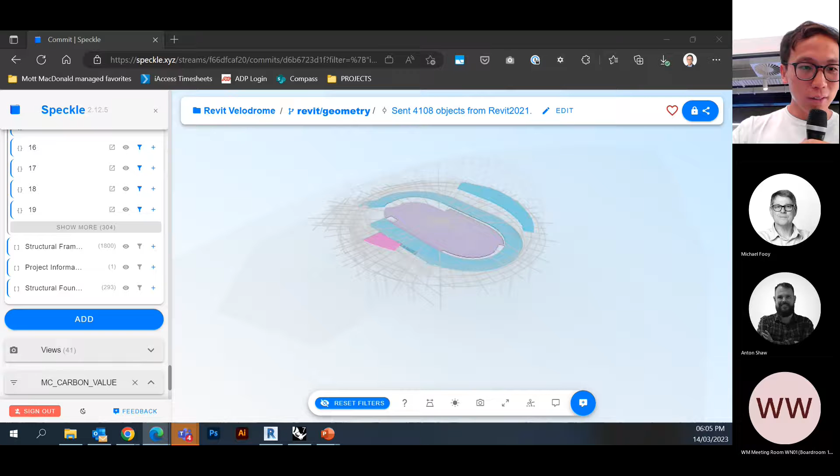Wellington, if you guys can hear us, give us a bell. The speaker should be on. Yep, I think we're good. Cool, awesome. All right, I will.

Preparing your data for visual analysis using Speckle. I'll begin my presentation with building information modeling. For those of you not in the construction industry, building information modeling is the creation of 3D objects within architecture, engineering, and construction industry that have extra data attached to them, otherwise known as metadata. Data is the most valuable currency of our time, and this is even more apparent in our workflows as they reveal to us exactly what it is that we're doing. Traditional building construction softwares such as Revit have these features built right in.

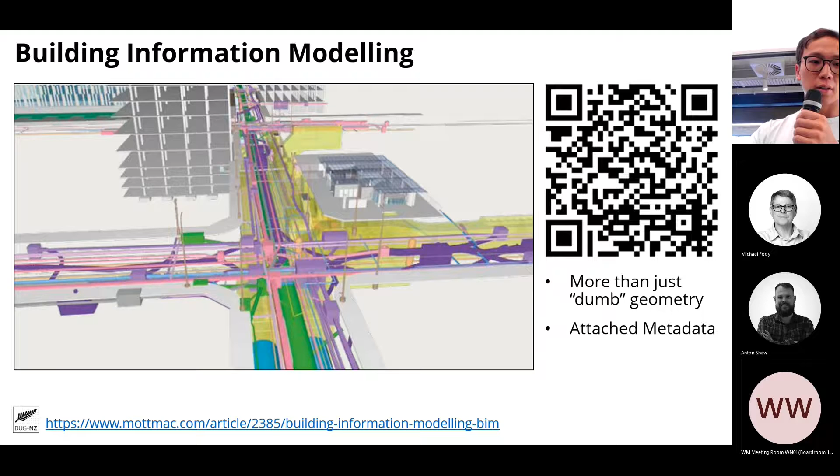But in other 3D modeling softwares, this is not the case. As part of our regular workflows, we use Rhino, an extendable 3D modeling software, together with Grasshopper, which is a visual scripting plugin for Rhino.

We use these tools in order to conduct various kinds of simulations and calculations. More often than not, all of the results of these calculations are often exported to Excel spreadsheets and lost in someone's downloads folder or desktop, and can easily break the link in our other BIM integrated workflows if not captured properly.

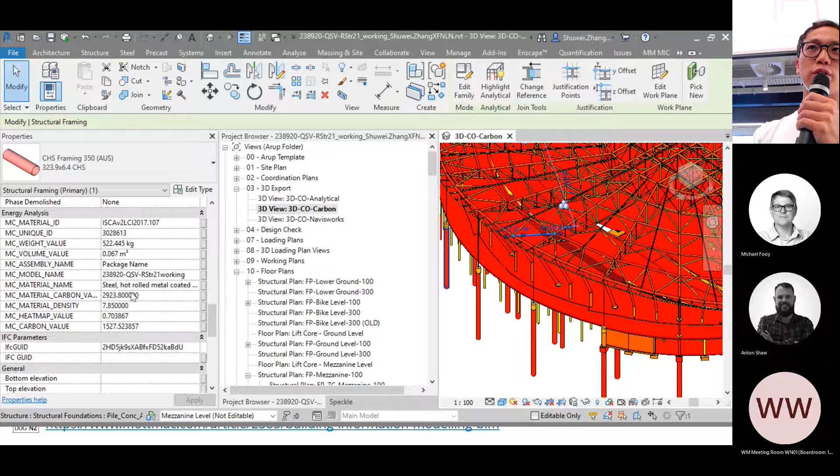So with this, I'll just quickly show you guys what the BIM environment looks like. As you can see here in our 3D model, we have an element that is selected and attached to it with various amounts of information on the side there.

Continuing on, this is where Speckle comes in. Speckle is an open source plugin built on top of many programs we already use in the day-to-day, with connectors to Revit, AutoCAD, and Rhino, and many others, such as Blender, Civil 3D, and other softwares.

What makes Speckle different from all the other interoperability plugins is the ability to freely customize your own data, choose what to keep, how you want to format them, and how you want to control them. This adds BIM capabilities to tools which otherwise wouldn't have had them, such as AutoCAD, Rhino, and by extension, all the other connectors they have there.

So in today's workshop, we will go over exactly how to do this in our Rhino Grasshopper environment and all the data that we can capture.

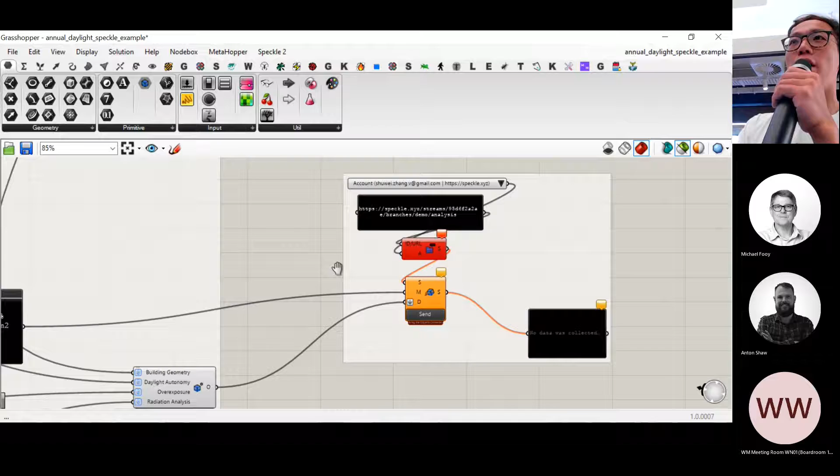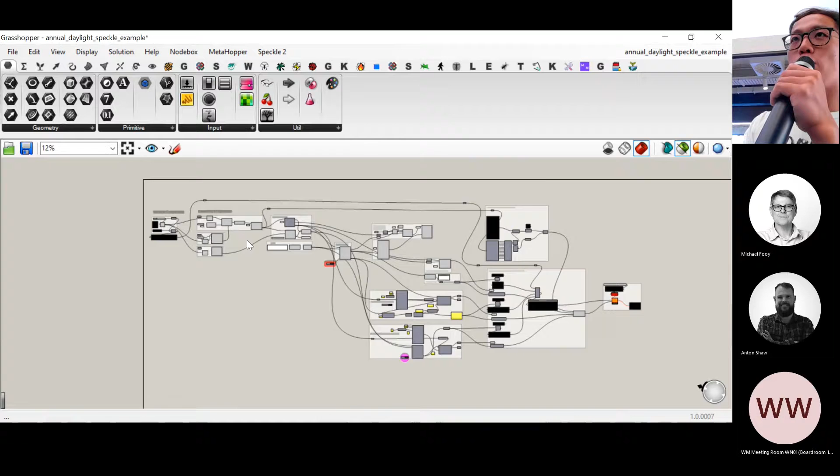Heading across to our live demo, this is a file that I've shared with everybody in our DUG user group GitHub repository. It's taking the simple example file from Ladybug Tools, which is one that we use for climate analysis and performance, and then attaching the Speckle component to it.

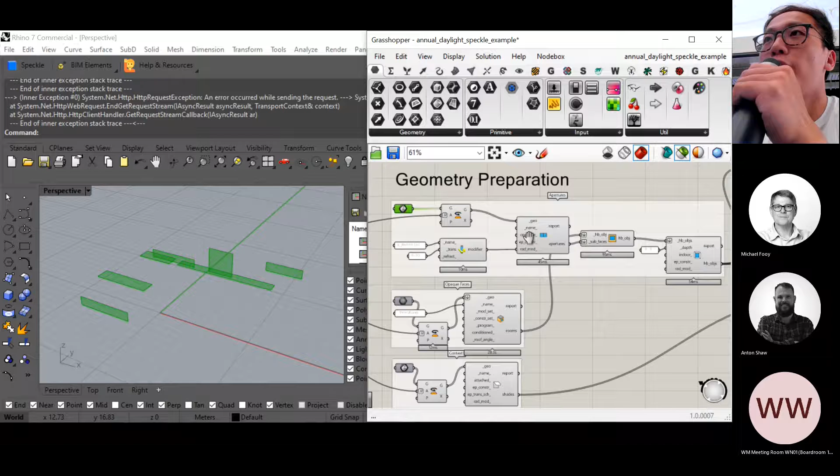I'll be talking through this script and showing you guys exactly what's going on step by step. In examining the geometry preparation part of the script, we have the example geometry, which is a bunch of windows, some faces of walls, and some shading devices in there.

From that, Ladybug actually goes and generates these objects, which I will show you here just as an example. And then what it does is it runs 3 different analyses here for looking at hourly illuminance of sunlight, visual daylight autonomy, overexposure results, and radiation analysis and results.

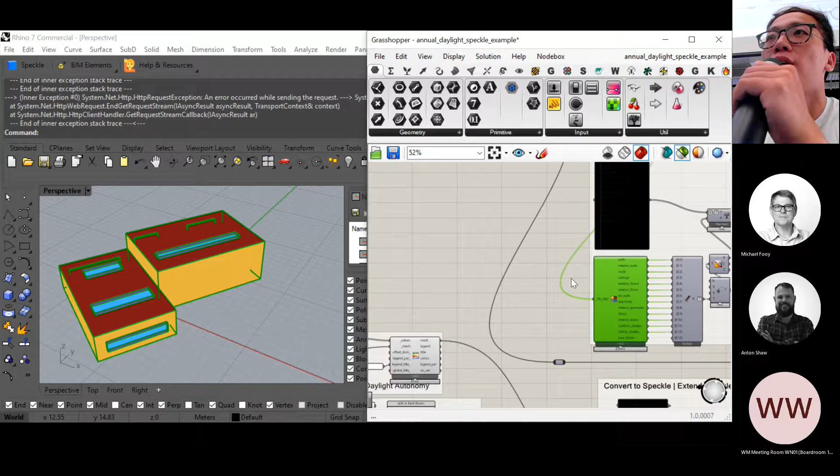By default, all of the data that's coming out of it, if we examine the data type, you'll see here it's just a mesh. Sometimes there's nothing, but otherwise it's just simple meshes. So how do we go from something like that to something like this?

And this is the bit where Speckle comes in. With Speckle, the really cool thing about it is that you can pretty much take any object and then send it across to the Speckle server in its schema.

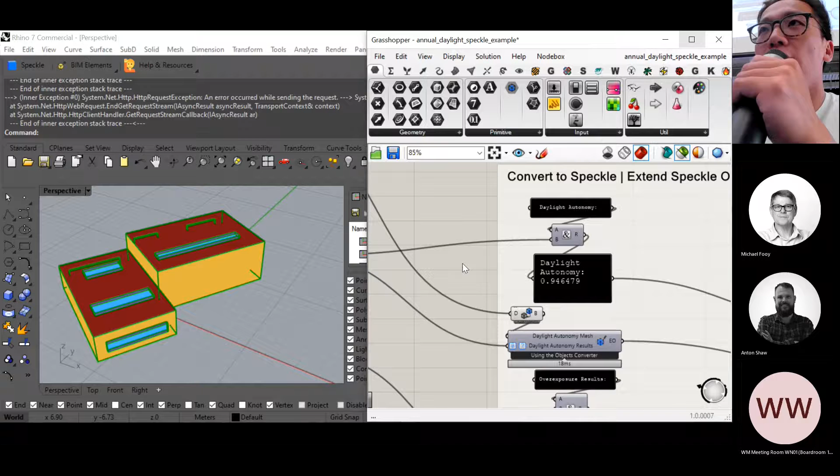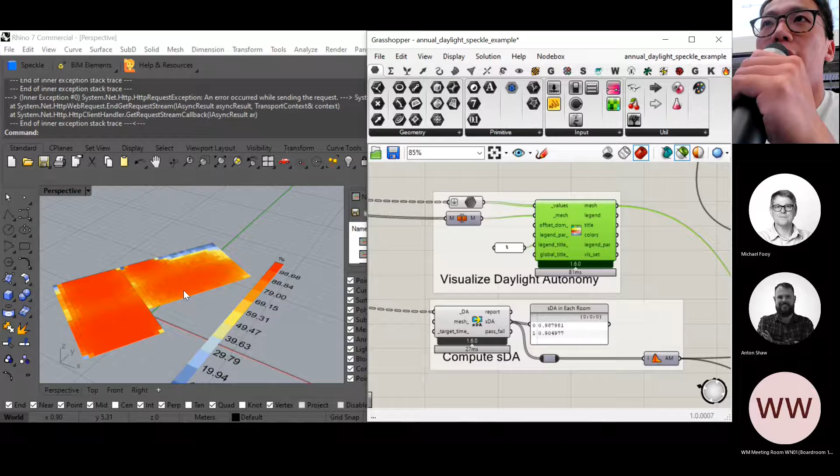I'll just go through what we have captured. Over here in our daylighting, here you can see the percentage of tiles on the analysis surface that give us above 90% daylight autonomy. And so you can grab the final colored mesh as well as the information here.

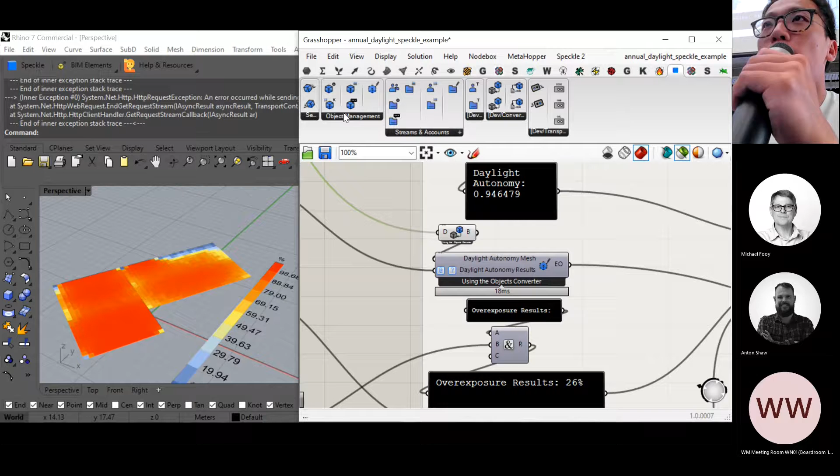Just by itself, it doesn't give us anything, but you'll see here when we convert this to a Speckle object, we have the option under our Speckle nodes to extend the object. So what I've done here is attach the daylight results from this into the object itself.

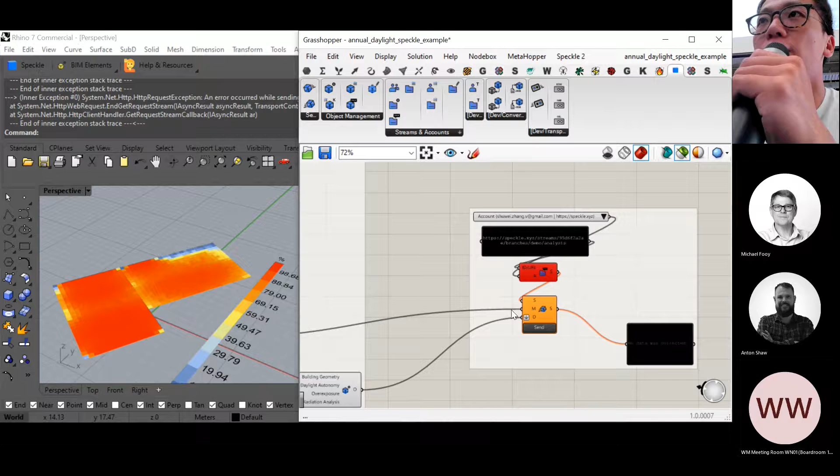That will give us an extended Speckle object, which we can then pass on to a collection of other objects and finally send to our Speckle server. So just run this one.

Once we are happy with all of the data that we want to collect, the cool thing about it is that we can start to think about, okay, well, maybe it's not just the daylight or the other results. We can collect all the other inputs as well.

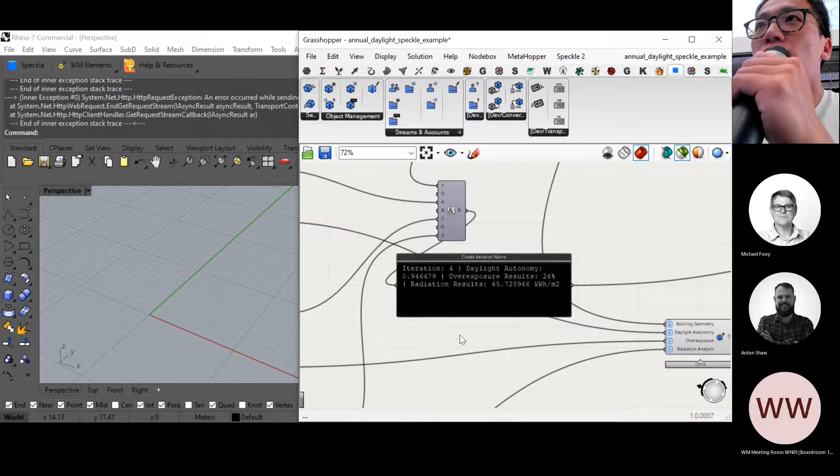So then what I've done is collected all of the results together into a name that's easily recognizable online. And that will help you sort through what you decide to upload. I've also captured the variations that you can do to the model.

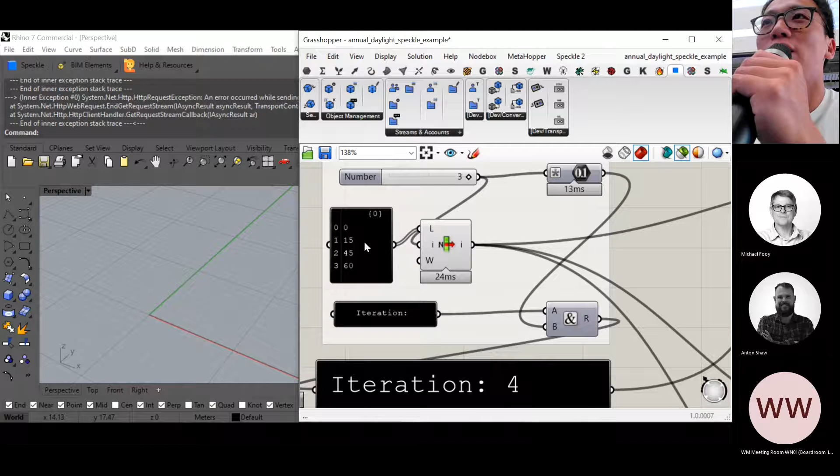In our normal workflow, we tend to deal with a lot of different design options, and this is a really quick way to go through and sort through those options. So I've got a simple setup here to rotate the entire building by 0 degrees, 15 degrees, 45, and 60.

As I toggle through them, you can upload these streams one by one, and then you'll be able to see it in the Speckle online interface.

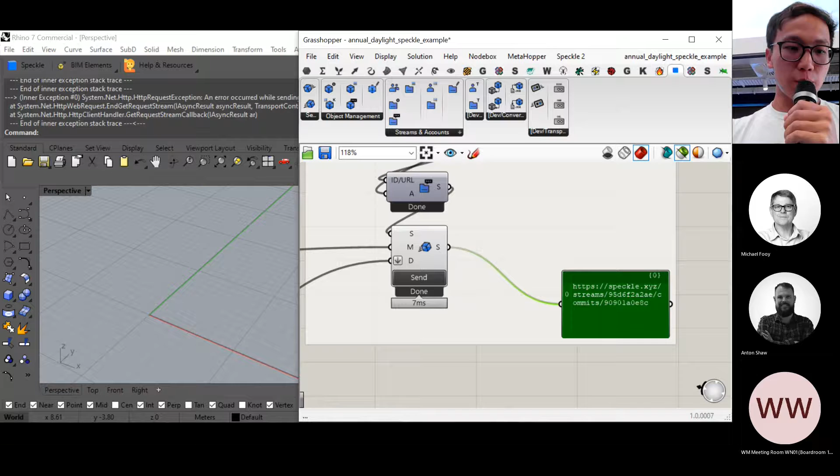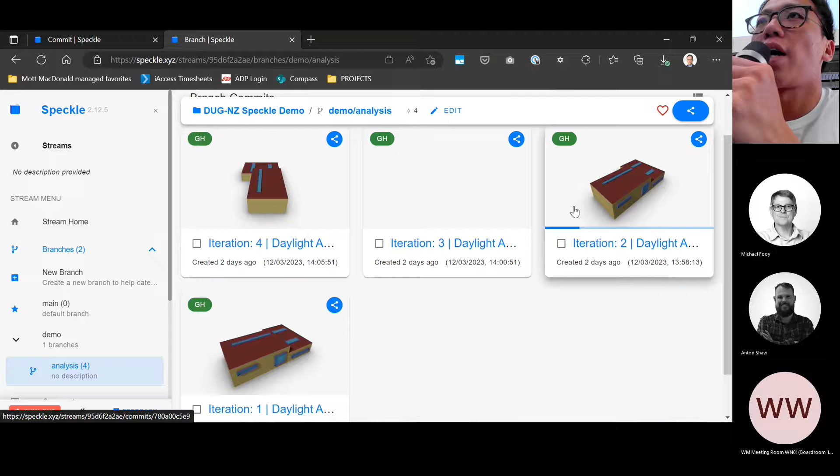So if I just go over to a Speckle page, you'll see here in the Speckle demo page that you guys all should have access to as well. There are all of the results that we have uploaded.

So if I go into one of those, you can see the results. Through here is where you'll see the breakdown of the information I've attached. The great thing about this is it's completely up to you how you want to structure something like this, because as you get more in depth into your projects, you can attach a lot of really useful, meaningful information to it.

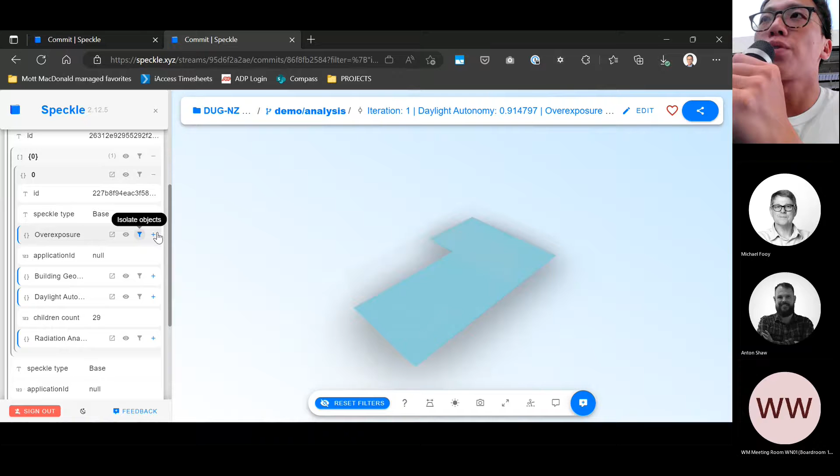So here I've got the overexposure results, as you can see, and then the building geometry itself, daylight autonomy, and the radiation analysis.

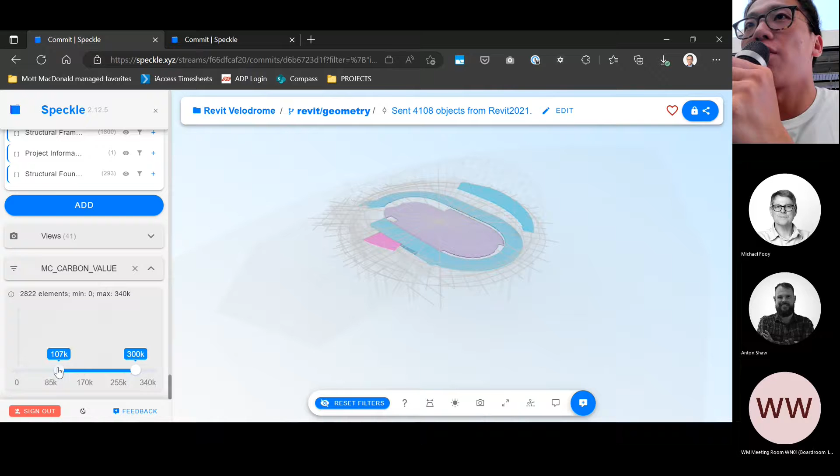So if we go over to the velodrome we were looking at before, what's really cool is that we're able to start filtering these elements by the values we've attached to them. So for example, if I wanted to examine the carbon value that is between 100,000 and 300,000 kilograms embodied, I can do that, and it will highlight the elements in your model that have those.

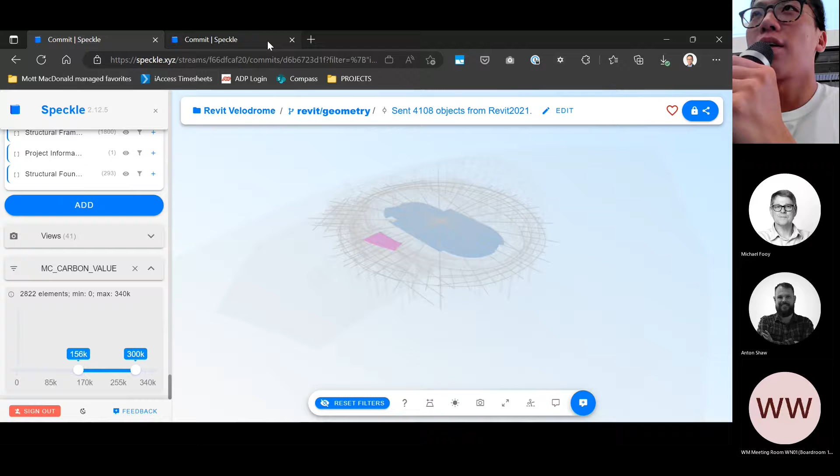And the cool thing about it is that this is a tool continuously being developed by the team at Speckle, who are constantly looking to add more features to improve it in your day-to-day workflow.

And so this wraps up the initial live demo part of the presentation. I'd implore you guys to all have a play with the example file yourselves when you get a chance and see what it can do for you.

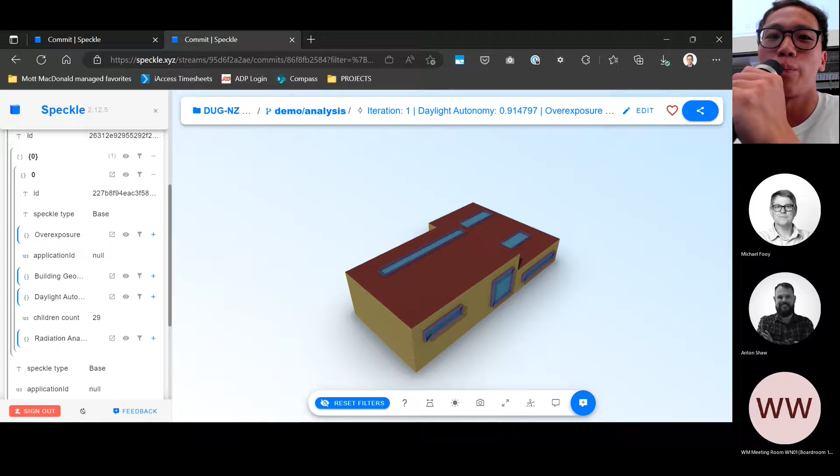And so back to our slides. So where can we go from here?

Because of the agnostic nature of the information, we're able to save a lot of time by creating a script which will run through all of the analysis and parameters we want to change in a model, which for us allows us to quickly sort through hundreds of iterations.

This way of integrating the data into our workflows allows us to examine all possible outcomes and pick the best option that aligns with our performance requirements.

And what this tool allows you to do is select from all of the multiple criteria and quickly filter out how many options fulfill those exact criteria. So they can either be the input parameters or the final results.

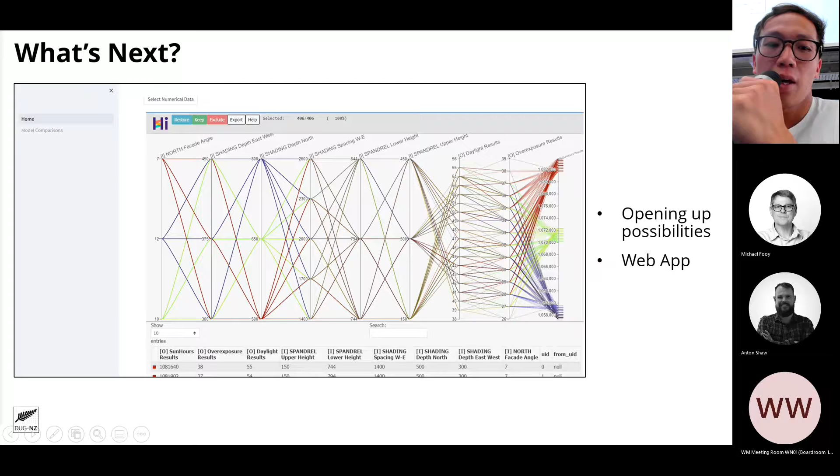And so when we're happy with that, we're actually able to bring up the models side by side and look at the differences there directly. So by leveraging the Speckle data, we can bring up the design iterations and compare them further.

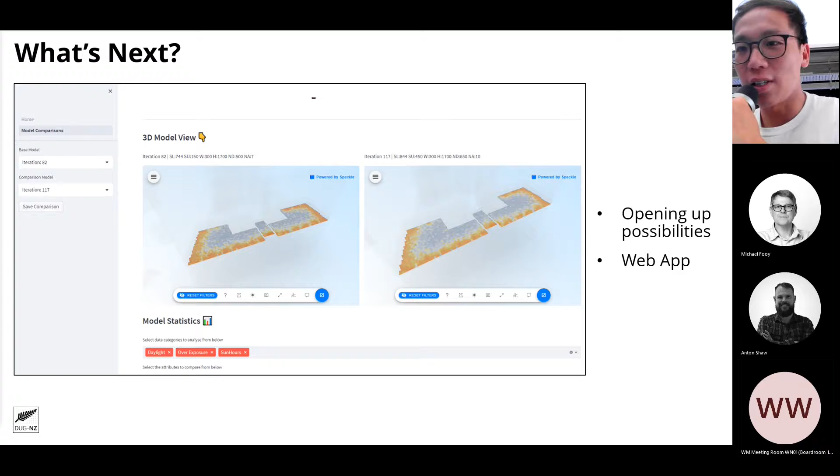So for design decision making, it's an incredibly useful at-a-glance tool to see exactly what's going on in our projects. And with all the model data attached, we can get an overview on the performance metrics of each option, seeing the reductions and impacts of our decision making in near real time.

Because this is connected live to our Speckle data, any future iterations that you upload can be compared and displayed through our web application. Because the Speckle data is not limited to just CAD software, they've now got connections to straight code in forms of Python and to software such as Power BI, which will allow you to fetch this information straight away as well.

And so this is just a small example of how Speckle can be used in an AEC workflow. I've only just scratched the surface of the possibilities here, but I'm very excited for where the future of it all can take us. So thank you for that.

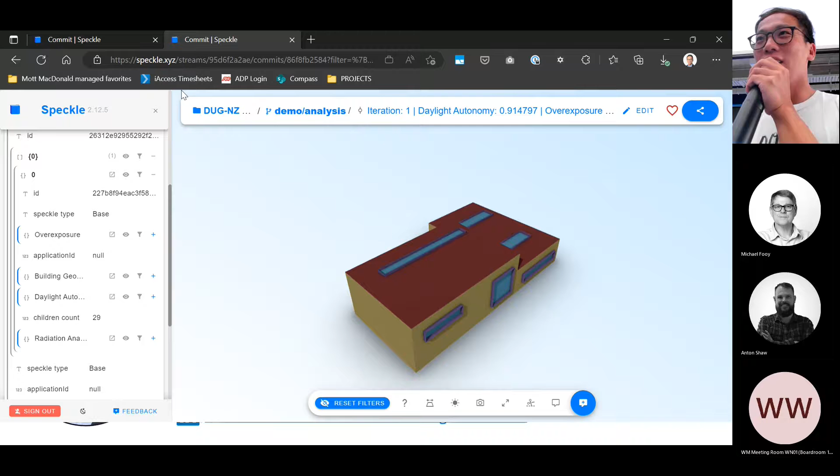Where I do think they're kind of going after BIM 360 is in the interactive element. When you add collaborators to your stream, you have the ability for people to start making comments, attach attachments or emojis, whatever you want, and that gets captured on the side as a history of like, oh, someone said this.

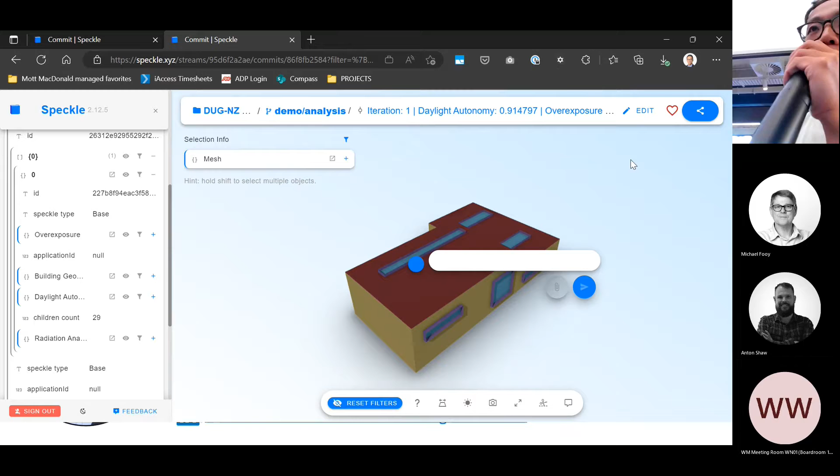And then the owner of that can go, oh look, there's a new comment, let's see what that says. And then you have a conversation of what's going on. So I think for the later stages of the project, it can very well be used as a way to capture comments or even reviews from people.

I don't think we touched up on that, but as you can push to Speckle, you can also retrieve data from Speckle. So maybe that's something you could talk about - how that happens - and perhaps you could get that message or emoji or whatever.

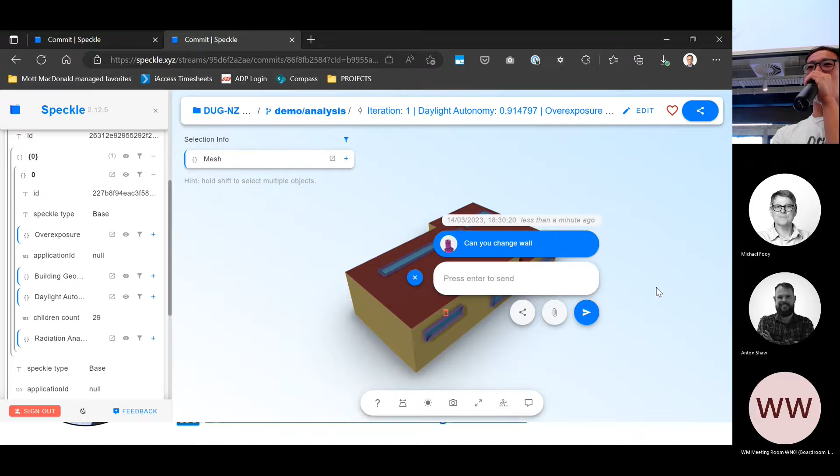In the pure sense, I've only been using it with the Python connector, but you're able to retrieve all the details about the stream, however many comments are in there, as well as the comments and which elements they're attached to. I haven't tried this feature out myself on the other connectors, so I can't really talk to that, but I'd imagine it'd be possible with that as well.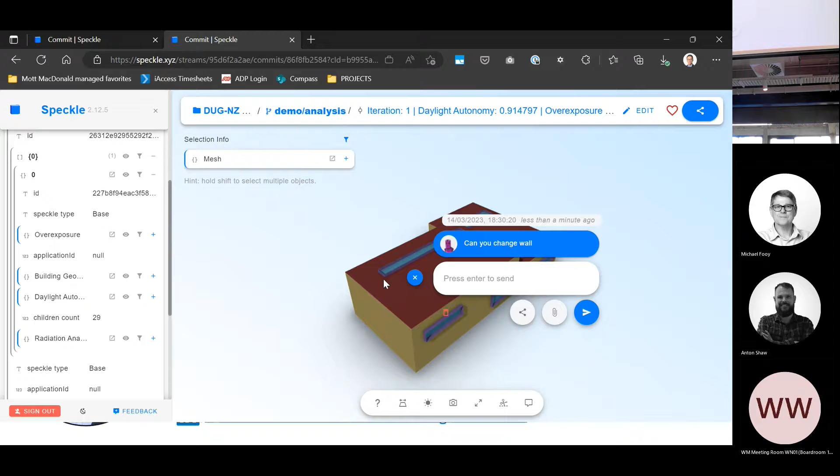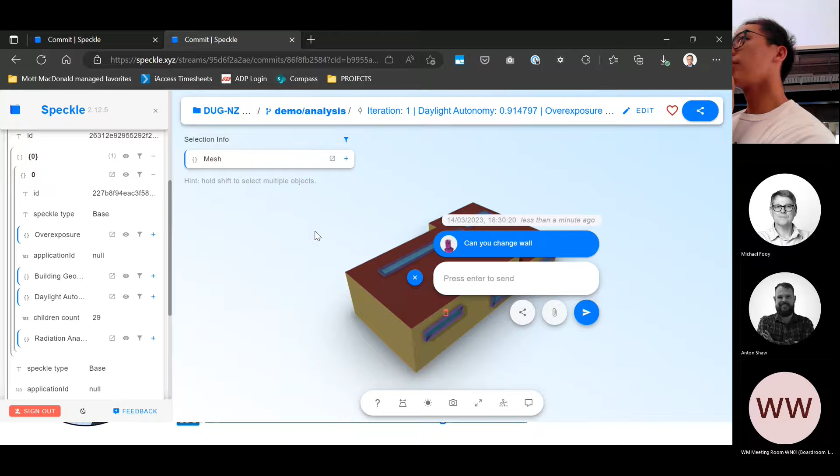For the actual analysis of the different disciplines, this can be a very good way of doing that, which I don't think you really have otherwise. The nice thing, as Shuwei was pointing out, is that you don't require a license for Revit software - then you can just test things out.

Without data loss as well. That's right, that's right.